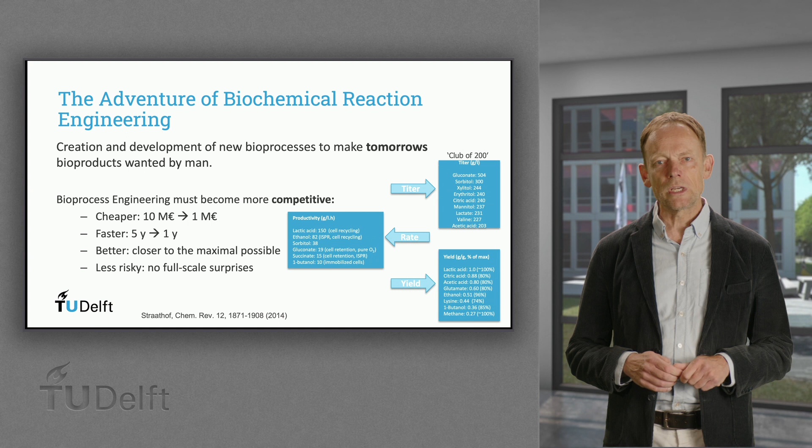As target for titer, we could take the Club of 200 as reference: documented evidence that a product titer of at least 200 gram per liter has been accomplished. For rate or productivity, we have witnessed examples of 10 gram per liter per hour, and conversion yield examples within 80% of the theoretical maximum governed by thermodynamics. The second main success factor is to do this in a robust way without surprises.

It is good to distinguish two product categories, simple and more complex molecules. The simple ones will act as commodities, and the complex ones are more the specialties. They serve different markets with different needs, and the fermentation solutions will be largely different, as will be revealed in this course.

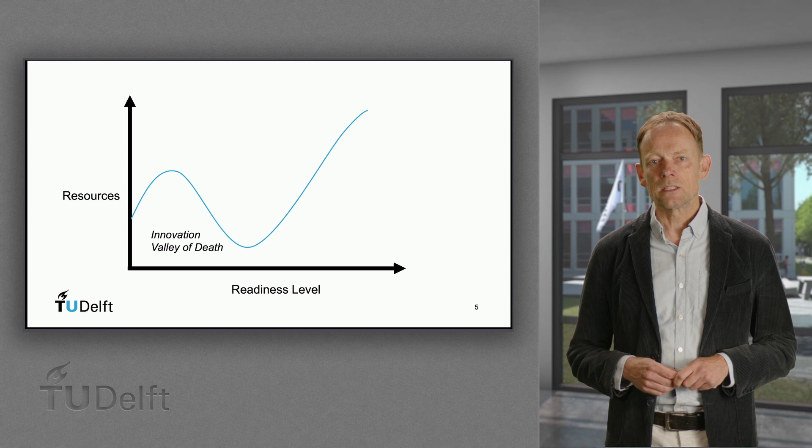Further important is to realize that a great idea and results in the lab do not guarantee commercial success. Many promising avenues have ended and will continue to end in the so-called innovation valley of death. In this course we hope to give you insights and instruments to cross this valley and achieve a higher rate of business success.

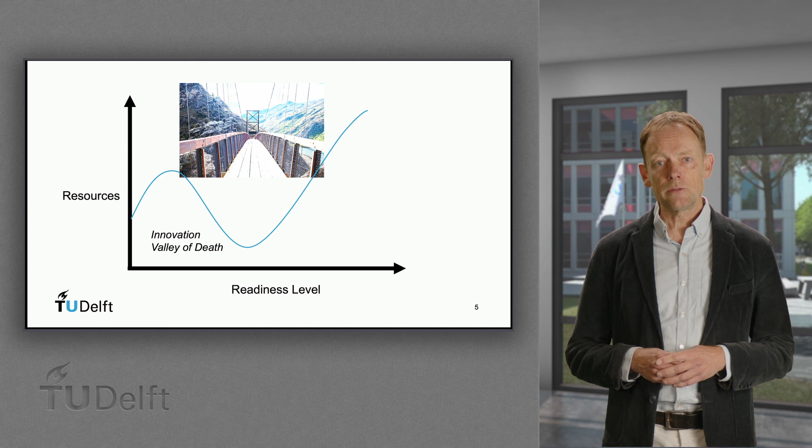The essence and mission of biochemical reaction engineering is then to come up with new and more efficient bioprocesses to make new or better bioproducts. And this is a two-step affair. First, we need to do the dream work, the conceptual design of the process and product. And only when this is done properly and with reasonable effort, then it is time to make it real: develop the process and engineer the factory. The dream work thus precedes the teamwork. And the rule is that better upfront thinking will unavoidably result in a faster and better outcome.

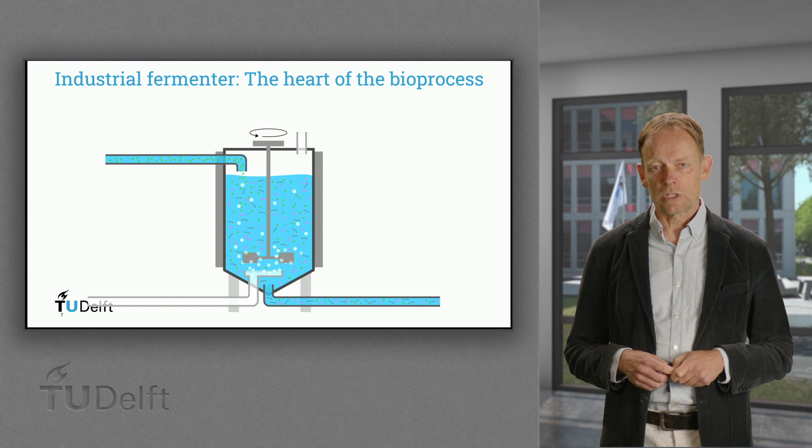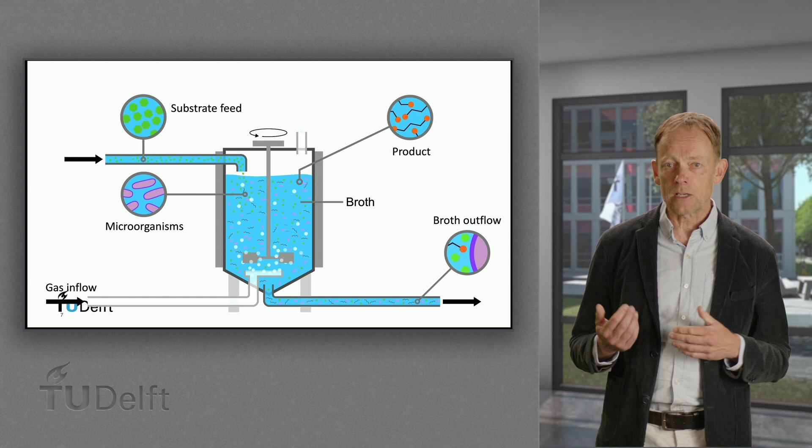The industrial fermenter or bioreactor is the heart of the bioprocess. There the renewable feedstock is converted into the desired bioproduct with the help of microorganisms present in the fermentation broth, tiny cell factories that are the masters of efficient conversion. Further needed is energy for mixing and often a gas like air, methane or carbon monoxide. Also, gaseous compounds such as CO2 and unused gas will leave the reactor. We as engineers should maximize the speed of conversion whilst maintaining the high efficiency or selectivity.

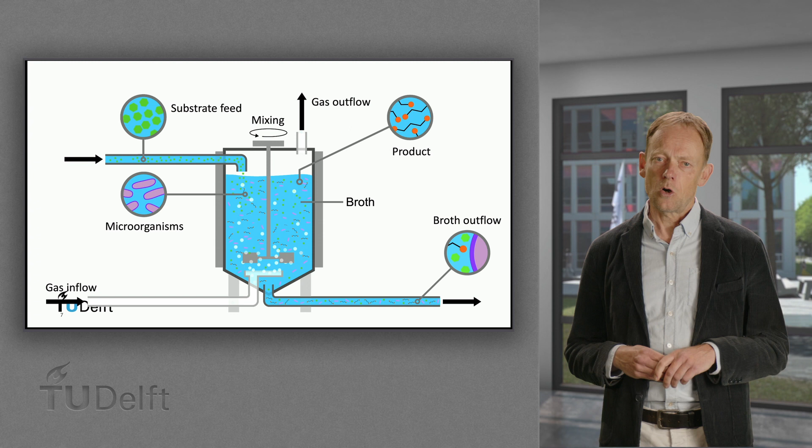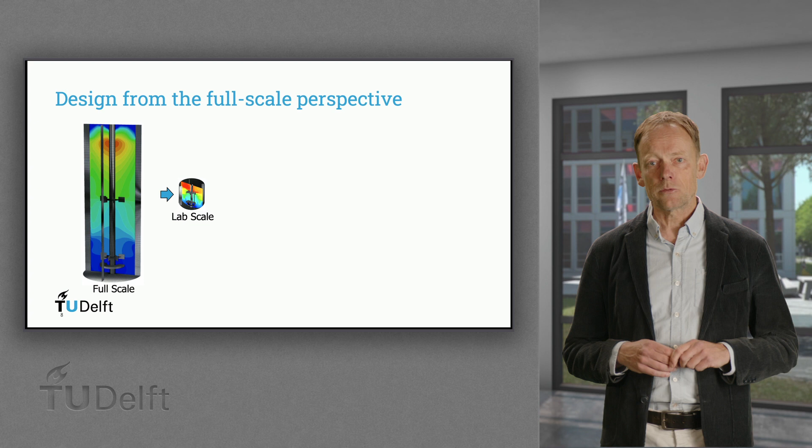An important rule, or perhaps better termed a design philosophy, is then to begin with the end in mind. The design of the fermentation process in the lab should be done from a perspective of execution at industrial scale. And this applies to both the medium throughput research and development stage and the high-throughput screening stage. Maintaining as much as possible the same environment of the cells in either scale, industrial, lab or screening, will secure similar performance and minimize surprises upon scale-up.

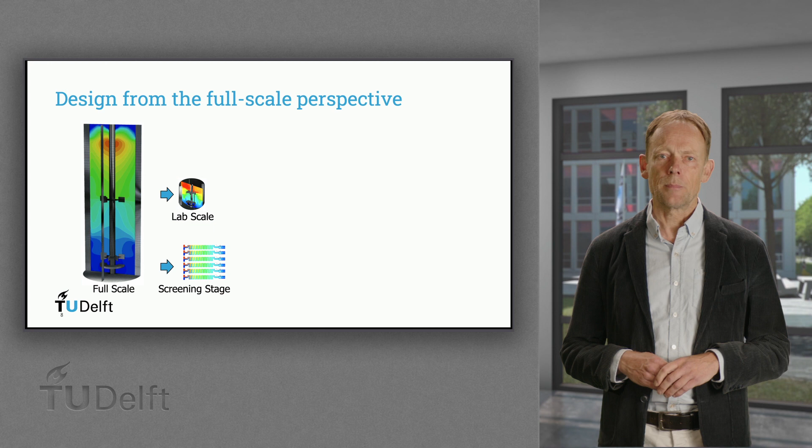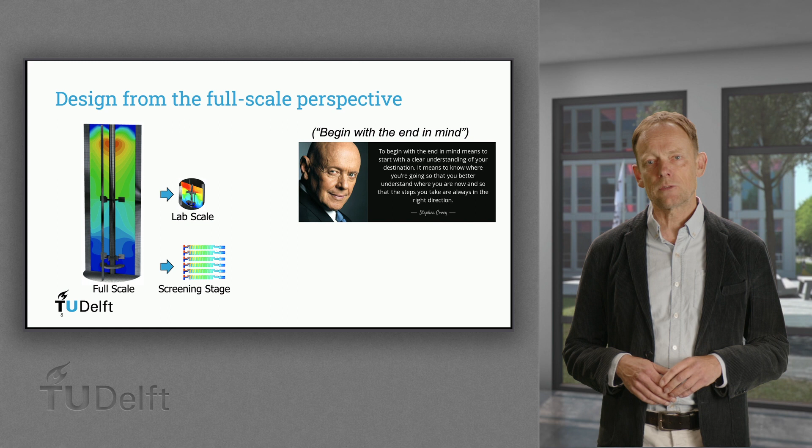The begin with the end in mind philosophy was first presented by the author Stephen Covey, and we have adopted it for our purpose with the following recipe. Begin with the product: its required amounts to be made, its properties and purity specifications. Then select the best feedstock for the product based on thermodynamics and verify if the conversion produces or consumes energy. And if the first is true, then a very large-scale anaerobic process might be feasible, which will be by far the most economic. If not, then there will be restriction in volume and cost, and economics and market deployment potential need to be carefully judged.

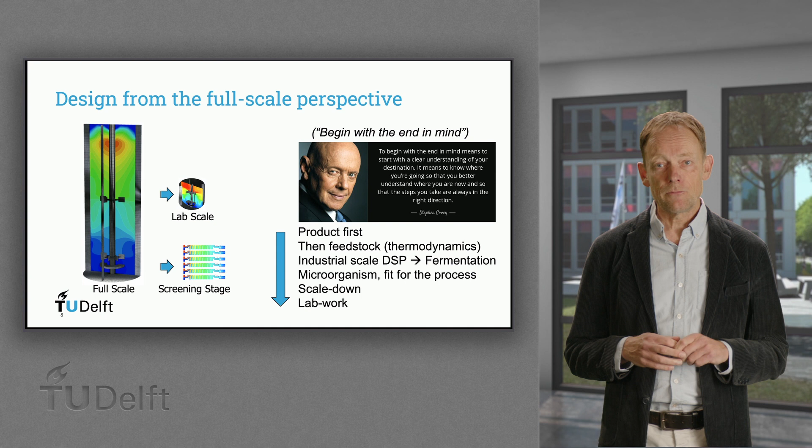The next step is then to select or develop the best microorganism for the process. Not the other way around, which is mostly the common practice today, but gives scalability issues. Nowadays, there are powerful strain improvement and evolution techniques available to tailor the microorganism to the task. Finally, the process should be scaled down to the lab and optimized there before scaling up to the industrial factory. This then presents an integrated approach to industrial fermentation development.

Operation in the factory, with limited measurements to satisfy minimum control needs, should be done jointly by factory and research experts. Optimization can be done either online in the factory or offline in the lab, where proper scale down of the cellular environment from the factory to the lab will minimize the risks of misalignment and scale-up issues later on. And even when there is limited information from the industrial scale, we advocate this end-in-mind approach will be feasible and the best way to safe scale-up.

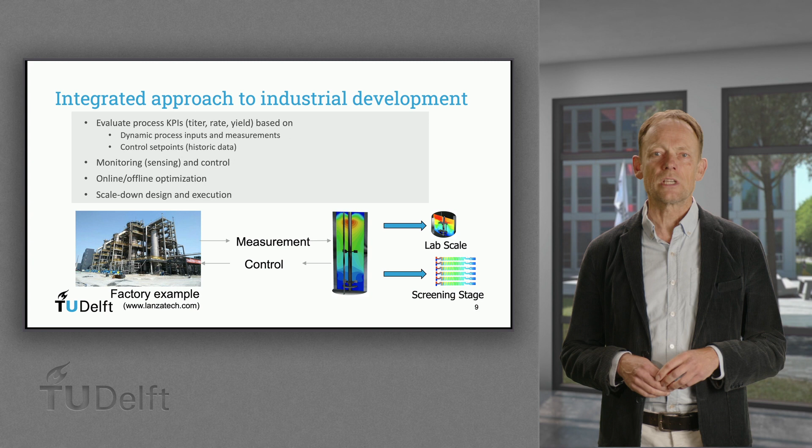The grand adventure in front of us then is to secure fast, environmentally sustainable and low-cost development and commercialization of tomorrow's bioproducts with minimal risks, failures and surprises upon scale-up. Conceptual design is highly recommended, where dream work precedes the teamwork. And this is often violated in academic education programs, where quickly one begins to deploy the engineering toolbox, the how, without having thoroughly scrutinized the available design options, or the what.

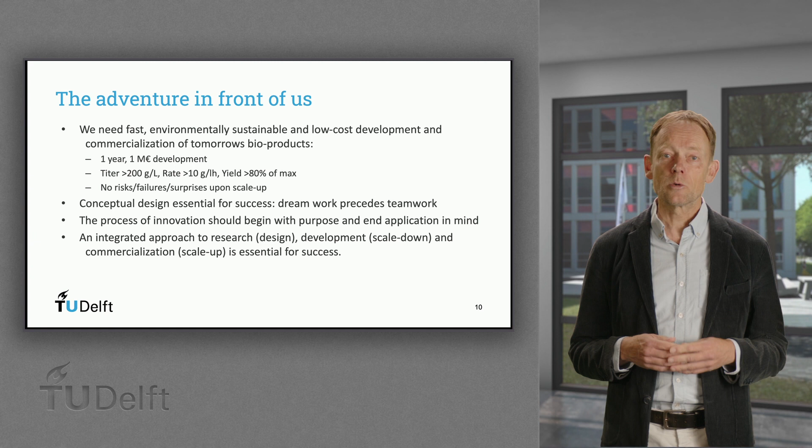The process of innovation should begin with purpose and end application in mind, and an integrated approach to research, design, development, scale down, and commercialization, scale up, is essential for success. I wish you an enjoyable adventure.